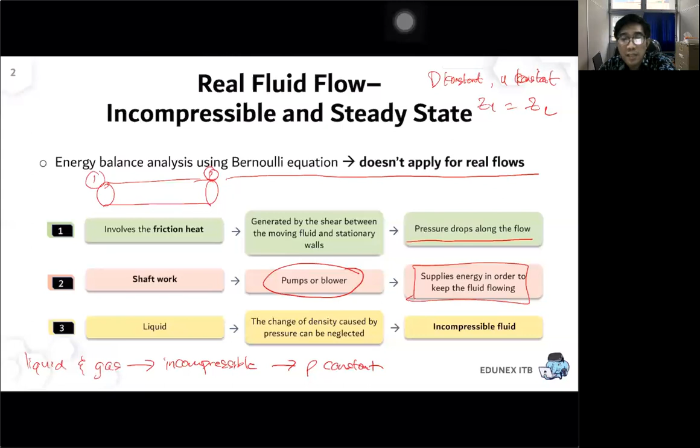For gas, even though there will be some change in pressure due to friction, since the pressure change is not really that high, the change in gas density can be neglected as well. So for this case, we still assume that both liquid and gas are incompressible, and the flow is still in steady state.

Steady state means you can use the continuity equation, right? The rate of mass, or the mass flow rate, at inlet and outlet are the same.

Okay, so this is an example of how to use a pump or blower. Basically, a pump, you can see at your house, maybe you already have one. It is used to get water from the well. Do you know how deep the well at your house is?

Anyone know? A student guesses a couple of kilometers, but is unsure. The instructor clarifies that most wells are like 60 or maybe 80 meters deep, which is already deep enough.

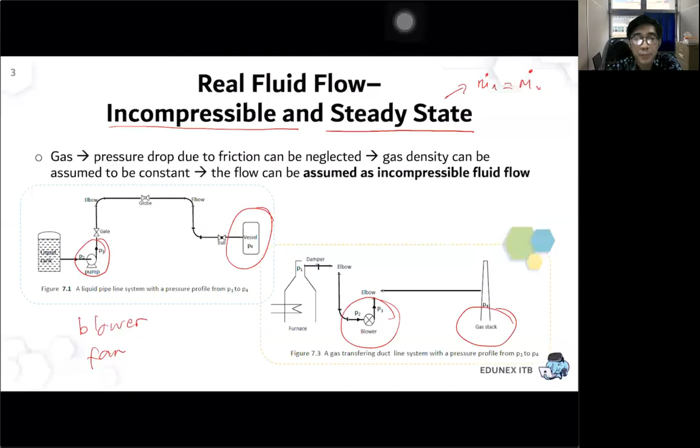So inside the pump, actually there are some types of pumps. Later, when we discuss pump and blower after this chapter, we will discuss the types of pumps and blowers. The most common one that you use at home is the centrifugal pump. Basically, inside the pump, it will have blades. The blades are moving, creating centrifugal force. So when water is flowing inside the pump, it will have additional energy from the centrifugal force. Same for the blower.

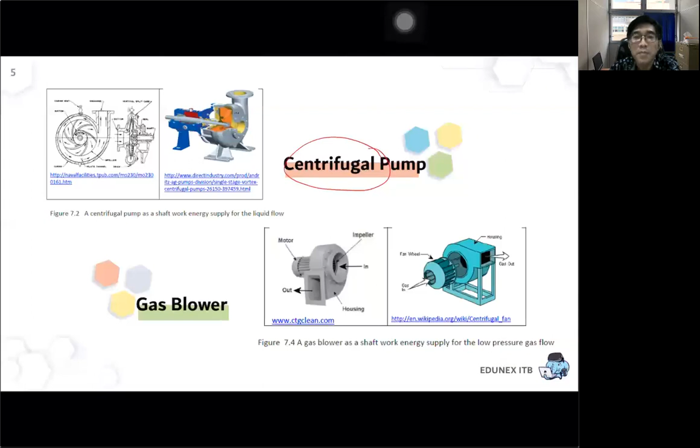This is the basic types of pumps and blowers. Okay, I'll move back. Actually, I have explained, right, if you have a straight pipeline and then you have fluid flowing from left to right, and the pipeline is straight with constant diameter, then what will be the effect of the friction?

Okay. Now, how to correlate this friction to the pressure drops? Basically, first we need to analyze the flow. So since pipes are in the cylinder shape, like this one, right?

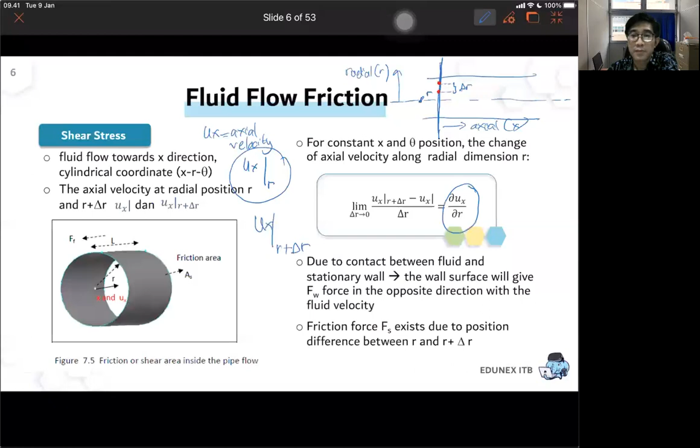Okay. So now, because we have 2 positions with the same axial position but different radial position, we can write down what we call velocity gradient. Velocity gradient is actually the difference of velocity due to different R. Because velocity at point R and velocity at point R plus delta R is different, right? Yes, sir. Okay, which one is higher? R, sir. Why? Because it's further from the wall. Yes, it's further from the wall. So the effect of the friction is lesser. So we call this one velocity gradient.

Okay, so just read the sentence below. Because there is contact between the fluid and the wall, the wall will give friction force in the opposite direction of the fluid flow. The higher the distance of the point from the wall, the lower the friction force. That's why the velocity is higher. That's why you will have the velocity gradient. Okay, any question first about this one? If there's no question, then I'll move on.

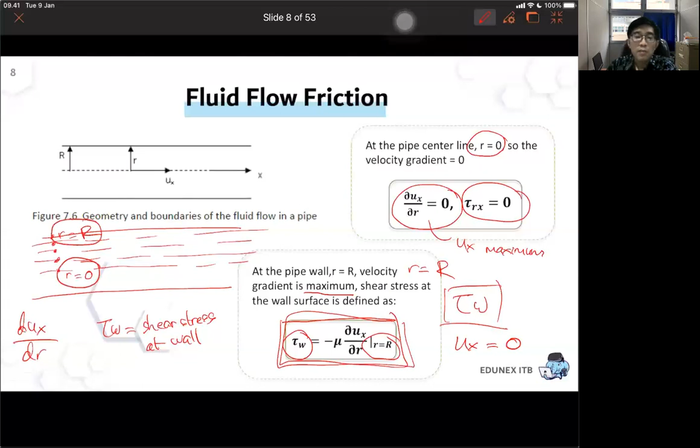Okay. What is the velocity gradient's physical meaning, by seeing these figures?

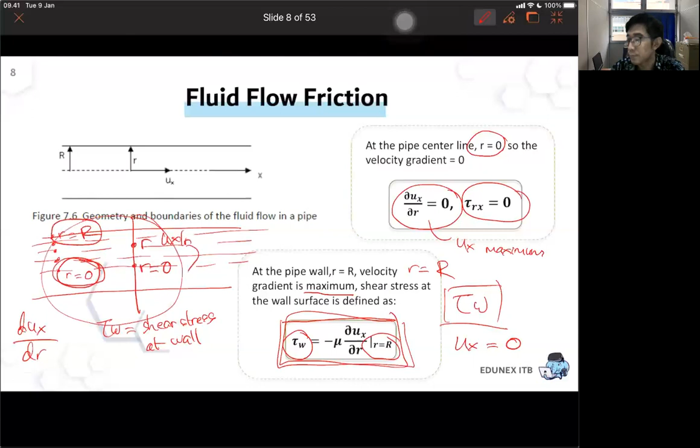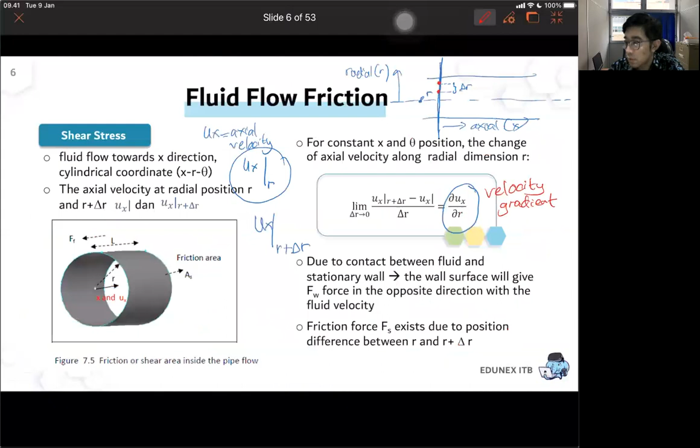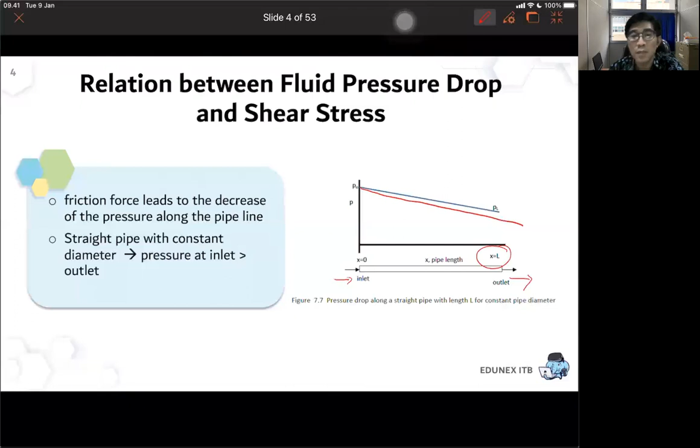Okay, before this part, I'll go to this first. Please remember that the friction force or shear force will create shear stress. Then shear stress will create the velocity gradient, and the shear stress will also create the pressure drop. Then how to correlate the shear stress with the pressure drop? You need to make the force balance.

Now do you still remember the force balance equation, or any balance equation? Accumulation equals input minus output plus generation minus consumption. Because we are talking about steady state flow, there will be no accumulation. How about generation and consumption? In this context, is there any force generated or any force consumed?

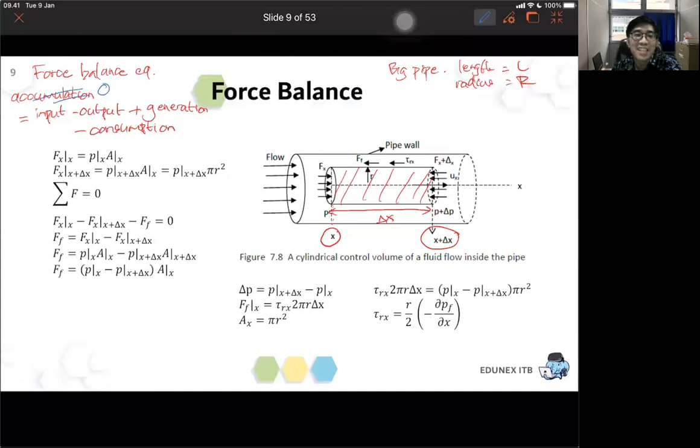Is it the pressure force there? No, no, that's not. Pressure force is the input and output. But during the fluid flow, please remember what I have explained to you. Is there any other type of force that is generated or consumed during the fluid flow? I don't think so, sir. Are you sure? I don't know anymore, sir. I already explained to you just now. What other types of force happen during the fluid flow?

Shear? Shear is being generated, sir. Yes, shear force. Shear force is being generated. But in terms of adding or decreasing the energy, will the shear be adding or decreasing the energy? Maybe decreasing, sir. Not maybe. Yes, it is indeed decreasing the energy because it's lost to the environment, right? So you need to remember or understand the concept.

So for this one, sigma F will equal 0. So force inlet minus force outlet, since friction force is decreasing the total force or the total energy, which is basically the same, right? Minus force shear should be equal to 0. Okay.

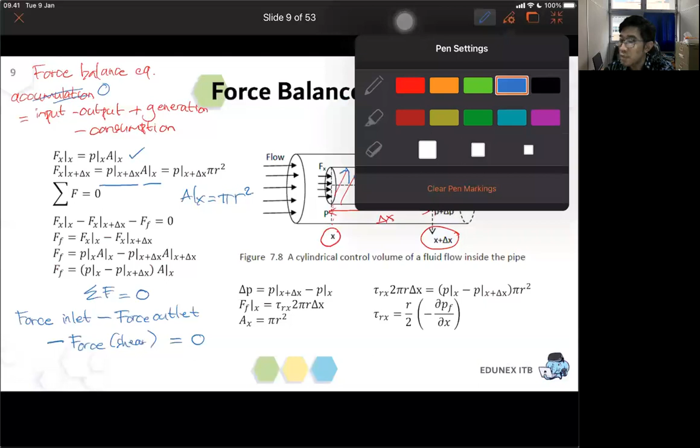Okay, and then sigma F equals 0. Sigma F is inlet force minus outlet force minus shear force or friction force. Then you can write down this one. This is the sigma F equals 0. So if you put the friction force to the right, then you can get this one. Then you change Fx and Fx plus delta x into this one. You have this equation. Until this part, do you have any question?

So, sir, this frictional force is the force that we have to put in the formula of the shear stress, is that right, sir? Sorry, can you repeat again? This frictional force that we're trying to find is the force that we will input inside the shear stress formula, right, sir? Yes.

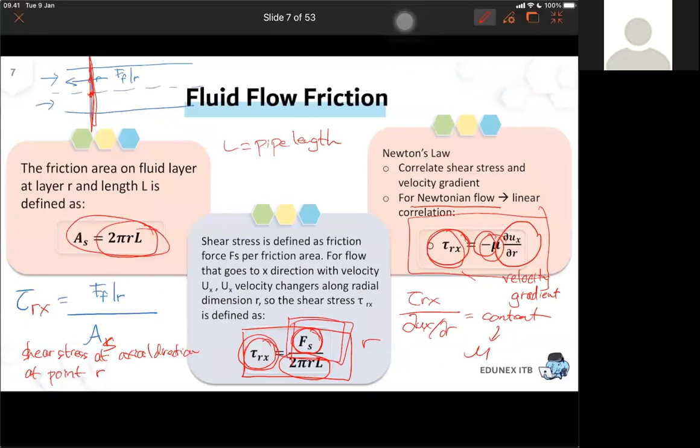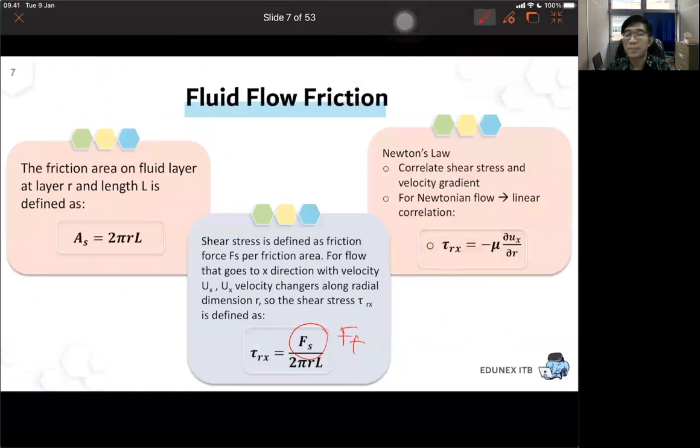Okay. So F friction is this one. Basically, F friction is this one. Same. Too many scribbles. So F friction is this one. Same. Okay. So until this part, we can understand, right?

Okay, then we define delta P. Delta P is outlet pressure minus inlet pressure. Because the inlet is higher, the value will be negative, right? And then friction force will be tau times surface area. Surface area for the friction will be 2πR delta X in the segment. But the cross area will be πR squared. Okay, from this one, you can go to this equation.

And by combining this equation from the left and the right, you will have the correlation between the shear stress and dP/dx. What is the physical meaning of dP/dx? The difference in pressure throughout X, is it, sir? This is called the pressure difference along axial position. It means tau Rx will create the pressure difference along axial position. This is to explain the previous figure, pressure along axial position. It will depend on the value of R.

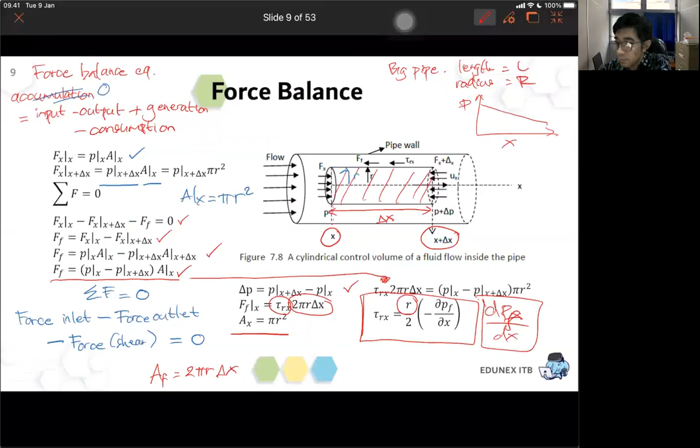Okay. Now, based on this equation, you will have this one: FF is tau Rx times 2 pi R delta X, right? And tau Rx is R over 2 times minus delta PF per delta X, from this one. Try to combine this into this equation so you can get this one. Please try.

So please find the correlation between EF as a function of delta PF and also EF as a function of tau Rx by using this equation. Okay, I'll give you 5 minutes. Is that enough? Okay, sir. You should get, please check, that EF will be minus delta PF over rho, same as in the box, or as a function of tau Rx it should be 2 delta X tau Rx over R rho. Please try.

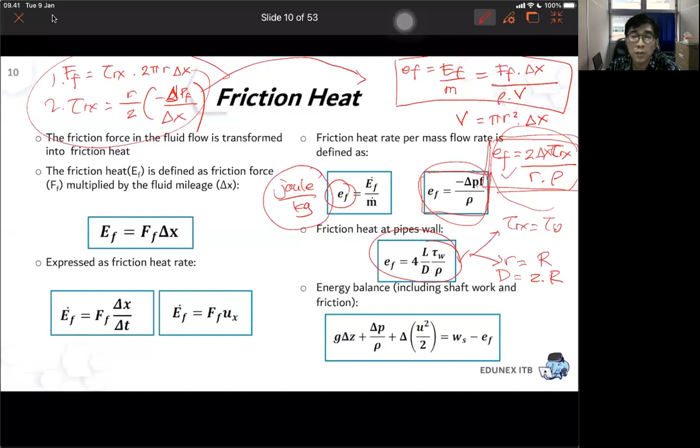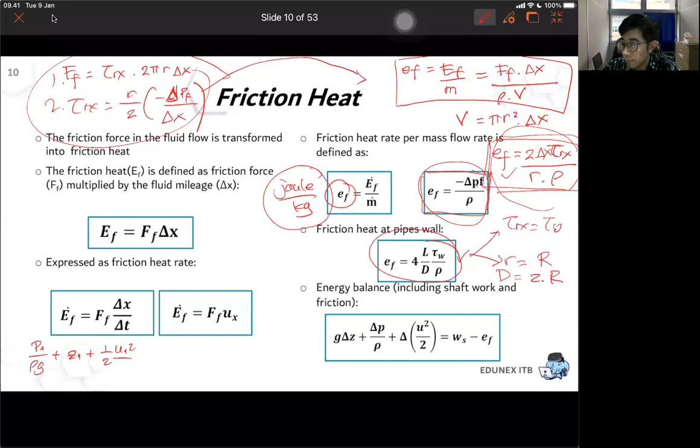Okay, now please remember, because small EF is specific heat or specific energy, then if you write down the Bernoulli equation, you will have this one, right? Correct? Yes, sir. Okay, this equation is only for ideal Bernoulli. Now we already know the non-ideality comes from the friction in terms of EF. Now in this Bernoulli equation, where do you want to put EF? On the left or on the right? And what will be the sign? Is it plus or minus?

It should be minus, sir. But I'm determining where to put it. If the sign is minus, you put it on the left or on the right. So position 1. I think it's on the right then, sir, because position 1 is ideally in the middle, right? No. 1 is inlet, right? 2 is outlet. Oh, outlet. This one, right? Okay.

So if you analyze the Bernoulli in the inlet and outlet of the pipe flow, where do you want to put the EF? On the right or on the left, plus or minus? I think if it's minus, it's in the left. If it's plus, then it's in the right. Why? I just think of it like it has to be balanced. Yeah, yeah. Because P2 will be less than P1, sir.

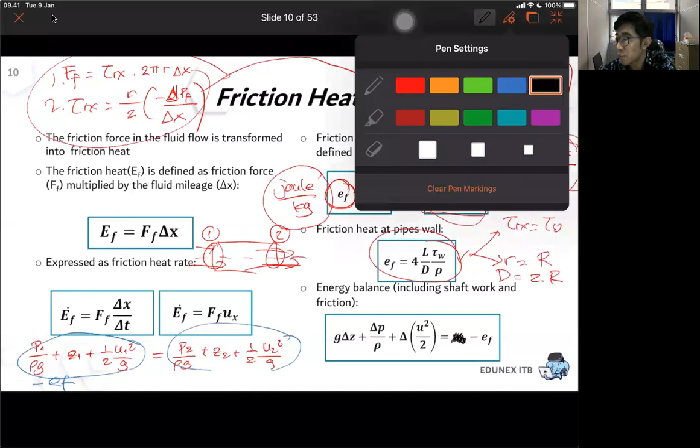So if we take the delta, please do not consider W because we haven't considered the pump. It's only the friction. So if you take the delta, delta means 2 minus 1. Delta Z means Z2 minus Z1. This one is P2 minus P1. But please be careful for this one. This one is U2 squared minus U1 squared, not U2 minus U1 squared. Just like this.

Okay, now you already know that the ideal Bernoulli previously only takes account of 3 types of energy. Now we introduce friction energy. If you use all in specific energy, the specific friction energy, small EF, then you can put it into the Bernoulli equation. It will be decreasing the input energy. You put minus EF in the input because it's decreasing the input energy. I think it should be clear, right?

Sir, can I also view it as accumulation has to be 0, sir? Accumulation is which one? This one is steady state, then the accumulation is always 0. Accumulation 0 means the total energy should be the same at inlet and outlet. But in this case, we already know about the energy that is lost from the system. So we need to take account of the energy that is lost as well. Okay, sir. Accumulation is always 0 because it's a steady state flow. Thank you, sir. Okay.